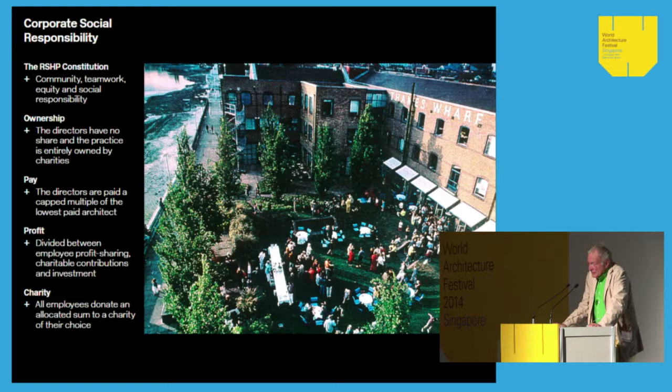We gave our office to charity. Charity runs it for us. It's a board made up of 2 external people, 2 internal people. We have the concept that nobody earns more than 8 times the lowest paid architect after 2 years.

The rest of it goes into charity. That charity is basically divided between profit share to all the people in the office, plus every person in the office has a charity he can give a certain amount of money to. It's in a way something about saying we're fortunate, I'm lucky, and we should share that fortune. It's very much about the distribution of our wealth, which is the critical problem of today, the lack of distribution of that wealth. So that's what this is about.

I shan't go through it. You can read it.

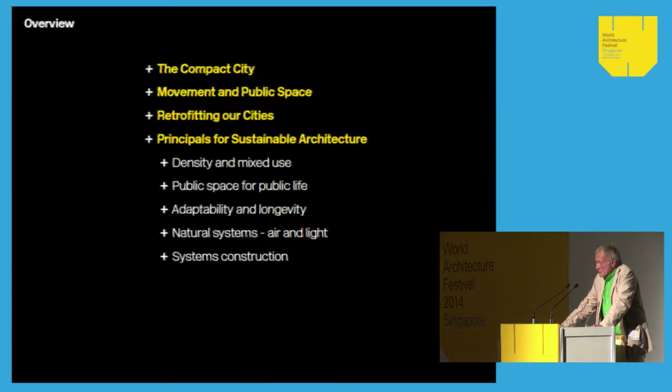And of course, the old cities. Here in Singapore, one doesn't have this problem, or nowhere near as much. But cities like, let's say, all the British cities, which have great interests, have tremendous areas of brownfield. Their retrofitting is more important, probably, than building. And the principles for sustainable architecture.

We've now got to an age where we're driven by, economically and culturally, by the large urban hubs throughout the world. 10% of the population of the world lived in cities 100 years ago. Today it's 50%, and in the next 25, 30 years we'll see 80%. More or less everyone is moving into cities, which is good in terms of climate change and sustainability.

Large cities use half the amount of energy that small cities do, and as the Sierra Club of America pointed out, a house built in the countryside to the latest eco standards uses more energy than a rotten old house in the middle of an old city. That's not so much about heating and cooling, it's about all the other things that have to go with it—first of all, a car, but also schools, hospitals, and so on, which also have to be rebuilt or built somewhere near them.

So environmental sustainability is critical to the hubs, and the hubs are now, in my opinion, the principal places. I hope that we will see a move towards many more, shall we say, Singapore-type—we nearly got Scotland-type situations—where we see cities and nations breaking away and becoming independent, but within a massive global framework or regional framework.

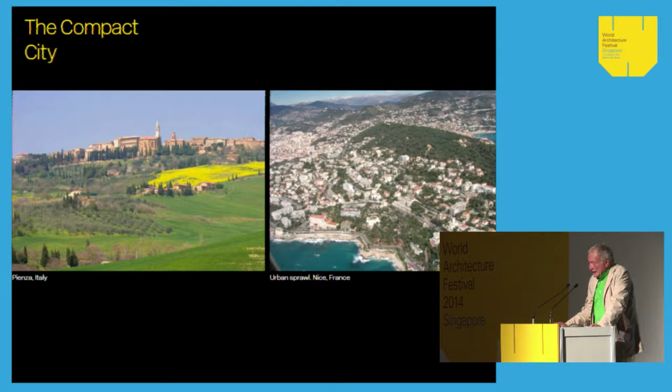And it is highly unsustainable. Two diagrams from the Urban Task Force, which I chaired. That was the government's, the Labour Party's government, Tony Blair, Prime Minister, and the Deputy Prime Minister, set up and asked me to chair this organization, which looked at how we could make cities more livable.

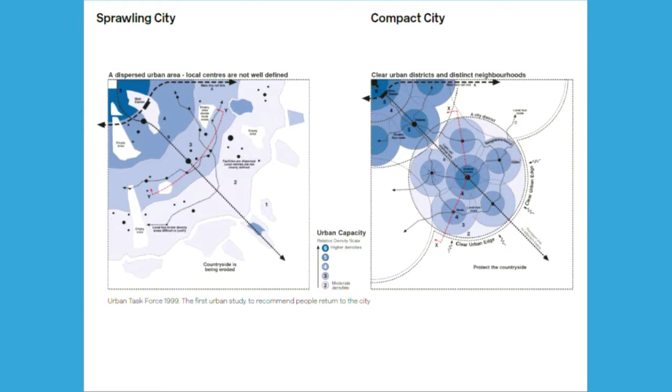On the left is the normal city. The blue, the darker the blue, the higher the density, the lighter, obviously the lower the density. There's no neighborhoods, there are no city centers. There is a sort of public transport which doesn't relate to it. It's typical of most cities which are not planned, which we have not thought about.

And on the right is the city of districts, of neighborhoods—the city which is related to transportation hubs, related to densities at the center, related to universities, health, and so on, all being within a walkable distance. And a sharp edge where you can get into the countryside when you need to.

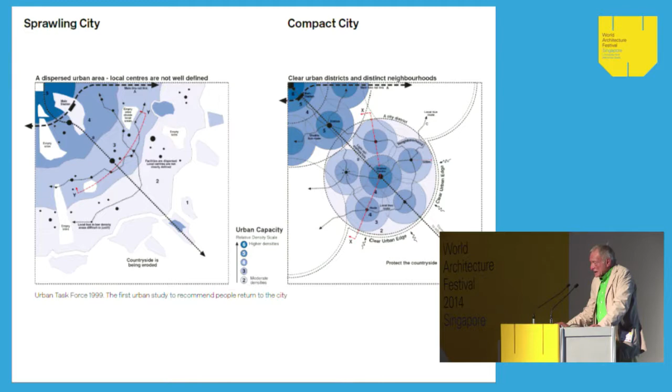Some of these are more related to problems we're having in Britain, but they are very much related to many of the problems. Obviously here in Singapore, you don't suffer from brownfield—that is, developments which have gone out of date, which have had to be demolished. But in most of the rest of us, most of it we do. And there's a new craze for new towns. I'll talk about that in a moment.

This is a new town in a city. This is King's Cross. You live, work, leisure. It's a true framework. It's got terrific communication. It has lots of public space. It has schools, it has hospitals. It has nearly everything. It's a true new town within a city, which is what I'm going to be talking about quite a bit today.

Maragall was perhaps the most key mayor in Europe, in the way they selected architects to develop the area. Because they didn't have much time, they didn't want to have competitions in those days, they selected architects that had some form of recognition, gold medals or silver medals or so on. And the standard of architecture is extremely high.

And up above there is Germany, Hamburg, another new town, the old port, which is no longer used, which is a wonderful new town.

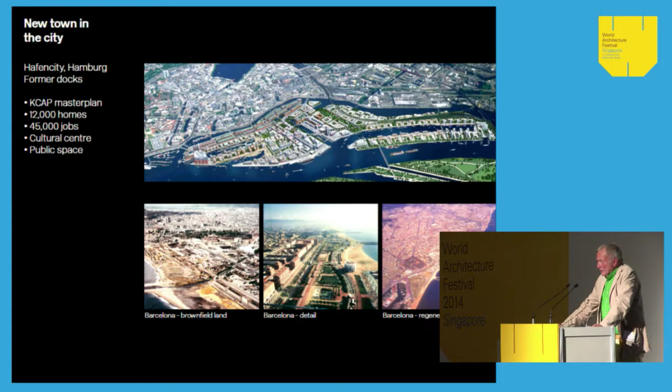It's only when you get to offices that you can get more height, and therefore more density. New York is different because you put it along streets. But in Europe, the highest density is usually achieved between about 6 to 8 stories. I'm not against towers, by the way. I'm not against density achieved that way. I'm not against towers for many reasons. I'll talk about that in a moment.

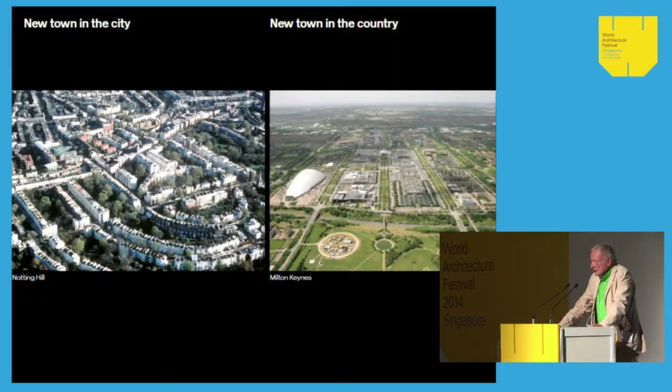And the right hand shows you have to use a car. You don't know your neighbor.

This response to Milton Keynes, and even more the early new towns like Ebenezer Howard's, were much more logical than they are today. 100 years ago, the average age of living in a city was half that of living in the country. Cities were hellholes. In 1842, the average age of a worker in an industrial city in England was 17 years old.

No wonder everybody wanted to get out, and that's understandable. That is not so now. Therefore, there's no reason in these type of situations - there are some situations where there is a reason for using greenfield land, but in our situation, Western European industrialized society, American, there's no reason for new towns at the moment, maybe in 20 years' time.

Changing to another of the themes I'm going to talk to you about, apart from the compact city, is movement and public space. In relation to celebration, we celebrate movement. Movement is enjoyable. Movement is what makes cities work - hubs and movement.

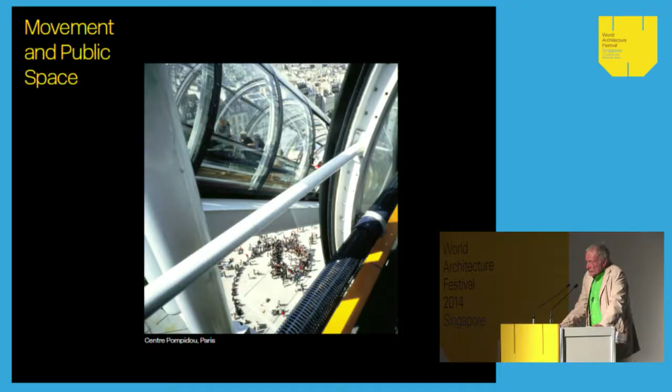This is Beaubourg, Centre Pompidou, where instead of going into a lift or elevator, with your head pressed against somebody you don't know - if you're a small person, into somebody's stomach - you actually look out and have this great view. Enjoy it.

And then, since this is the question, movement can be a driver of form. In this situation, not only do people perform below it and look down at the circles - people watch people, really important mantra, people watch people - but also, of course, you're looking out to the rest of Paris, and it's a fantastic view.

In terms of regeneration and movement, Trafalgar Square - if there is a centre of London, there isn't really, because London is unique in that if there is a protection of London, it's the sea, so we don't start from the centre and move outwards. London is really 32 towns in search of a centre, the 32 boroughs, and therefore it's dispersed. But if there was one, it would be Trafalgar Square, and up to 10 years ago, it was a roundabout. So we had what was once called the heart of an empire, and the heart of an empire was the roundabout, which seemed to be wrong.

We did a plan for it and exhibited it at the Royal Academy, I think in 1986 - this is part of it, the one you're seeing now. It was then put into form by Norman Foster, and it is now a fantastic square. The lower one is the north side of the Thames, which we are trying to close, and continuously try to at least pedestrianize. After all, cities are for people, not specifically for cars. Cars have their advantage in some situations. You want to minimize them if you can.

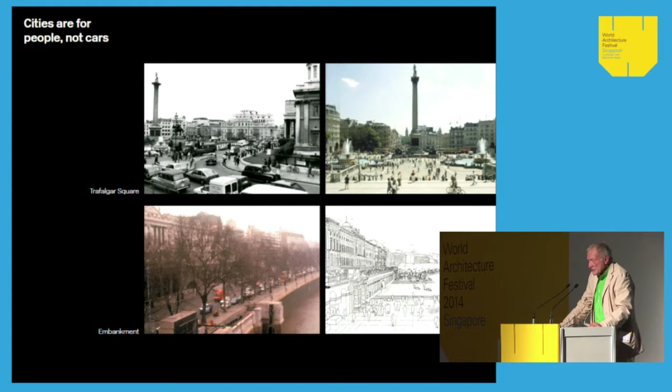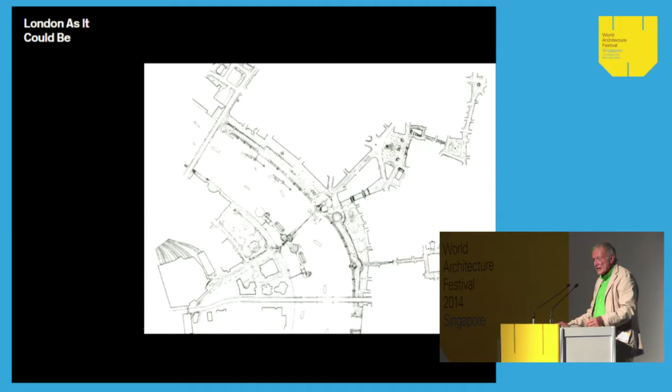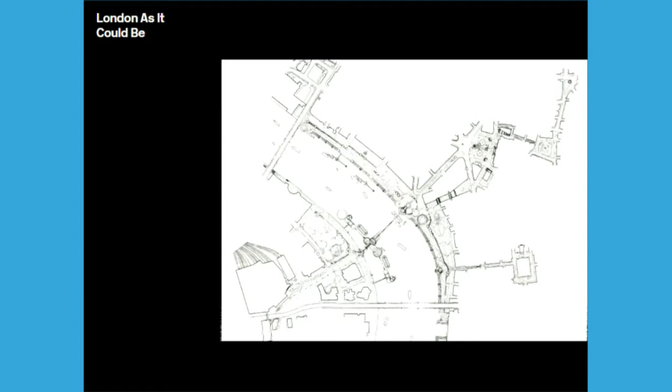This is a plan, I won't go through in detail, about beginning to humanize the center of London. The most successful part is the South Bank, which without doubt is the best urban regeneration in London, where people can walk with their parties, where there's a mix of all cultures. But here also you can see Trafalgar Square. We want to do Parliament Square, which we've failed, and so on. It's again, how do you do it step by step? How do you plan for the future to make your city more human?

This happens to be Strasbourg, a city where these trams were put in about 15, 20 years ago and have changed the nature of the city. They've freed up whole spaces where you can have squares, where you can have shops, where you can enjoy yourself, where you can get what little sun you can get in Strasbourg.

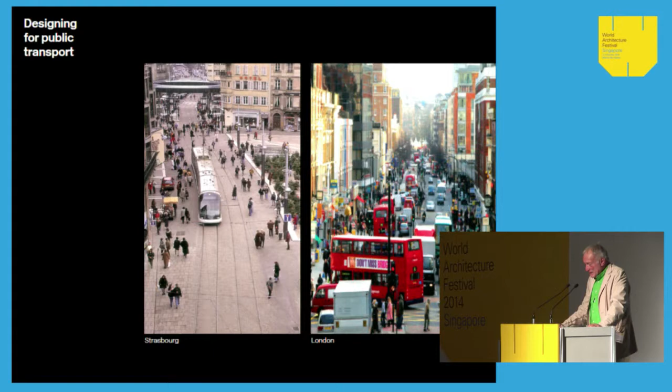Copenhagen has, first of all, one of the highest livability rates, enjoyability rates anywhere in the world. A third of people in Copenhagen go by bicycle. It takes all the pressure off the transport, by the way, though you have wonderful transport systems here. So most people go by bicycles. They've also gone with the brilliant Jan Gehl, who's followed, especially Copenhagen, for the last 50 years in film and drawings to make it again more humanistic.

A couple of figures that interest me. Population using public transport: 81% of the population of Los Angeles uses the car to go to town. Not only do 81%, which means nobody meets anybody, except if they're going to a film premiere, but in fact Los Angeles is over 60% tarmac, or whatever you call it here, macadam, black stuff on the roads. That is way beyond anywhere else. It's also got more roads than everybody else, and it's got more congestion, which tells you that building roads is not the answer to the problem.

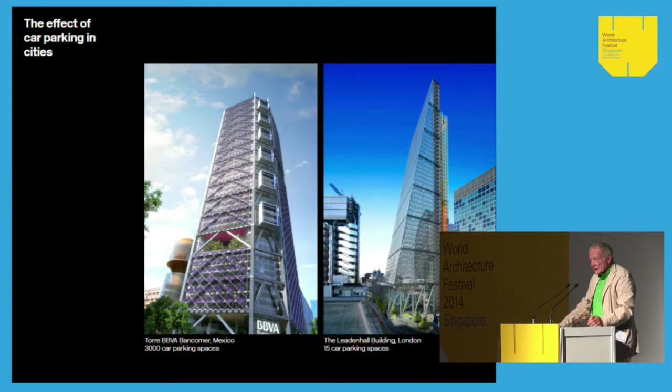So it's a question of being decisive about how you control transport. And I've never heard any complaints, by the way, in the City of London, the city that I've lived in for more or less all my life. It has never been an issue.

So the point of talking about expanding outwards is: let's densify these areas before we move outwards. Not so much densify, intensify would be the right word—to intensify around those hubs. I'll be talking a bit about those in London, and there are hundreds of these.

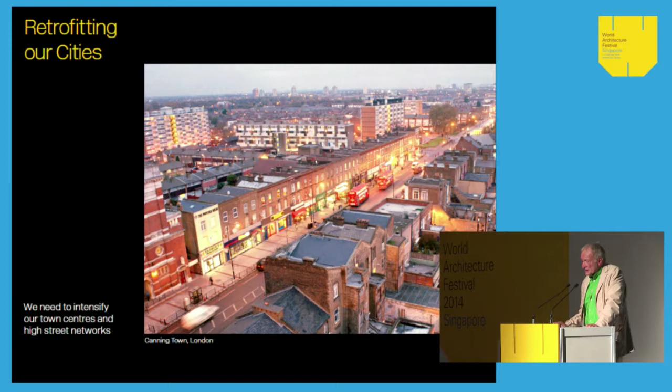If you look at this photograph, you could easily add 100 housing units or apartments without any difficulty. And there are 600 of these in London, which more or less meets the problems that we have in London.

Manchester, the second largest city in Britain, just over 1 million. This is one of the problems of Britain—it's got London, which is booming. It's got about 8 million, growing a million every 10 years. We'll probably be at 10 million within the next 20 years.

These cities, like Manchester, have massive areas of dereliction. This is just off the center—you'll see a diagram in a moment showing the center. In large part of this area, only 1 out of 5 buildings are actually occupied. The rest are derelict. We're talking about a nation which is the 5th richest in the world, so you have to say there's something wrong with the way we deal with buildings.

I believe that housing, a roof over your head, should be considered the same as food, as health, as education. It's in the same range. Somehow we believe it's really a manipulation of capital only.

So Manchester, which, as I've said before, is a successful city, has these vast areas of dereliction. So people move out towards the countryside, have to buy cars, and so on.

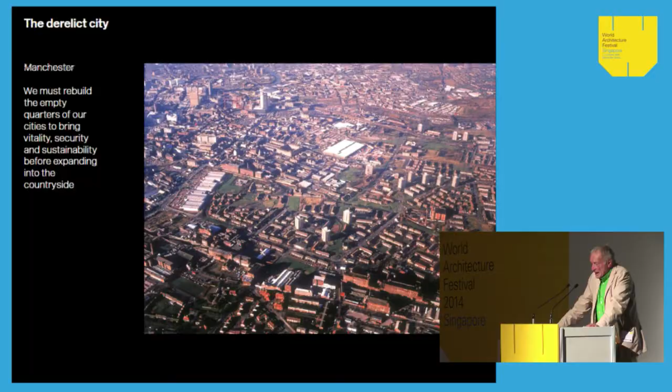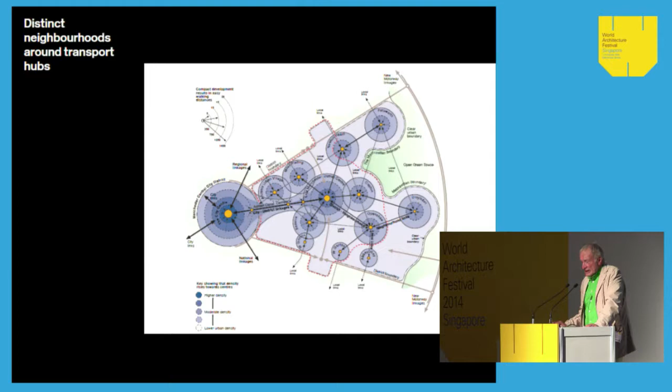Now we are moving towards that—it is more successful, it is better. Last week I attended the Labour Party conference at Manchester, and I told some people: just look, walk from the station to the conference and see how much brownfield there is before we build new towns outside. Even in Manchester, the second richest city in Britain, there's a vast amount of derelict land.

London has gone through a revolution. In the 1980s, when I started building Lloyd's and began to get involved in the City of London, the general feeling was that London was sort of static, and that Frankfurt would be the next business city of Europe—it would become the hub of Europe.

Now it seems strange to us. I've nothing against Frankfurt—anybody who comes from it, I'm sorry—but London has a lot more than Frankfurt has, because it's a real mix, it has everything. Somehow it picked up, and London is extremely exciting. I'd say that today, and we've talked a number of times to planners here, London, together with New York, are the only two global cities.

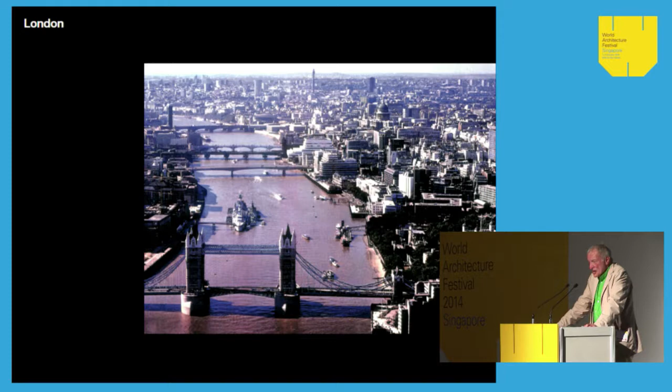It does show you that in 20 years, the whole thing can change over quite quickly—probably happened in 15 years. Going down the drain, Lloyd's of London were talking about maybe having a second headquarters in Frankfurt, getting ready for the debacle in London. Fortunately, they didn't—fortunately, most people didn't. And London is now amazingly vital.

You can get nearly anything in London, from culture to business. Extremely, extremely expensive. Why is it expensive? We just got to that point.

One of the problems, very much a problem in England, is that whereas in Hamburg, which I showed you, Barcelona, France, the Netherlands, etc., basically the elected councils do the planning and the basic designs, then go out to contractors, housing contractors and so on to build—we have this funny idea that the answer is, we need housing, therefore let's go straight to the big volume house builders.

But the volume house builders, and they would agree, are business people—their interest is profit. If one house will get a better profit than 100, they'll build one house. If there is a restriction on housing, that pushes the costs up, which is what's happened to London. London is now, I read the other day, the most expensive city in the world.

This is a problem, a lot to do with residential. A lot of the problems stem from the way we have handed over the power of development to house builders rather than to society, which is the community and therefore the elected body.

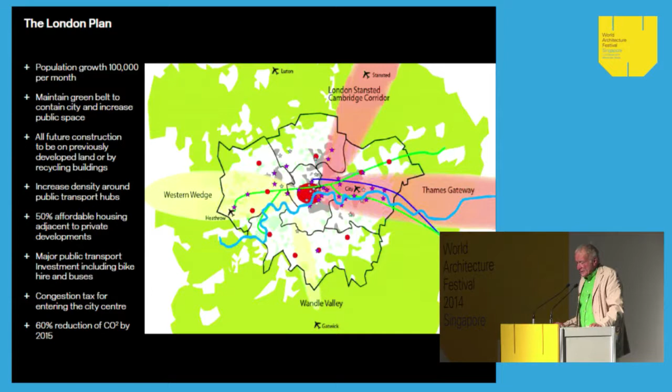They were very exciting aims, dealing with the population, dealing with keeping the green belt. We built well, at quite a high rate. We used no greenfield whatsoever. We banned greenfield. The urban task force said always brown before green, brown being the derelict land. Ken went beyond that, he said never touch green. I won't go through all these figures, you can read them perfectly well.

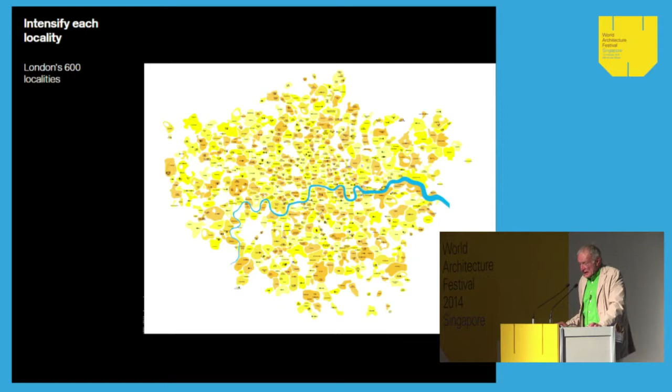This is research looking at London at what we've called localities. Localities are places where 2 or 3 shops, maybe a kindergarten, a health center, a few bits, something creates a nucleus. There are 600 of them in London. They are the vitality of London. Those places are all within walking distance of housing. You never need a car to reach your nearest locality, which is one way we defined it. It's an interesting way of looking at a city, not just neighborhoods or districts or cities, but right down to what is a locality.

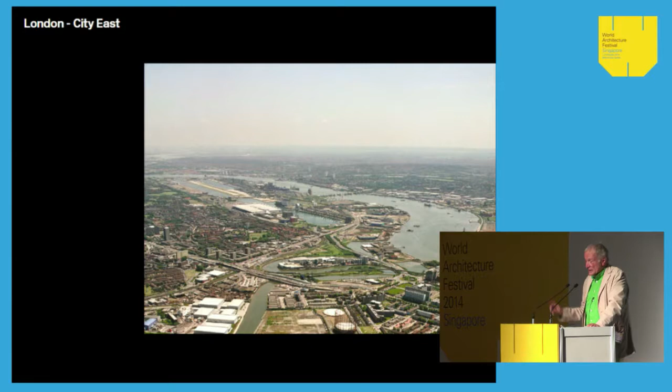This is a bit like the Manchester situation that we haven't built here. This is the Docklands. London was one of the world's greatest ports, was the world's greatest port. Now nobody goes by ship to London because if they're going to go by ship, they'll go off much nearer the coast. We were also a massive manufacturing area, especially of cars. All this has gone, leaving behind a vast area of dereliction and poverty. Three of the poorest boroughs in Western Europe are here, three of the 20 poorest boroughs in the whole of Western Europe are right here in London. London is probably the richest city in Europe. It shows an inability to distribute wealth.

The point we're making all the time is fill these in. Start from the center. If you're developing, start from the center and outwards. Start from the hub outwards. Start from the district center outwards. Start from the city center, move outwards.

This is a study we made which showed we could get a vast number of dwellings in that area: Royal Docks, Canary Wharf. The Olympics was a roaring success, and in terms of the Olympics, it's opened up a whole area of new housing. It's another new city.

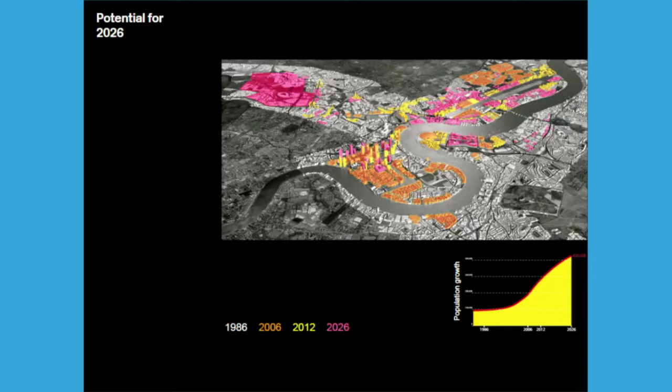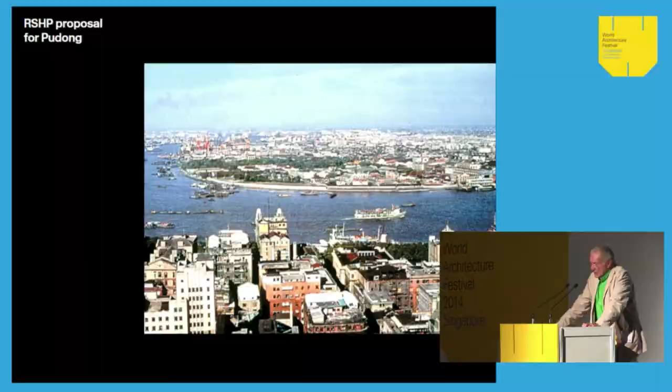Shanghai. We were asked, I think by Mitterrand, in the early 90s, to talk to the mayor of Shanghai. There were 6 firms asked, a consultation rather than a competition, to talk to the mayor about the development of Shanghai. At that point, Shanghai was about 9 million people. It was all bicycles, it was all walking.

It was obviously at the beginning of a new era, in the sense that things had changed vastly since dominant communist control. The mayor wanted to know how to proceed and what we could do with Pudong. Pudong had no links, being across the river from the Bund. The Bund is the area on this edge here, a wonderful part of the city with great buildings. We made some suggestions.

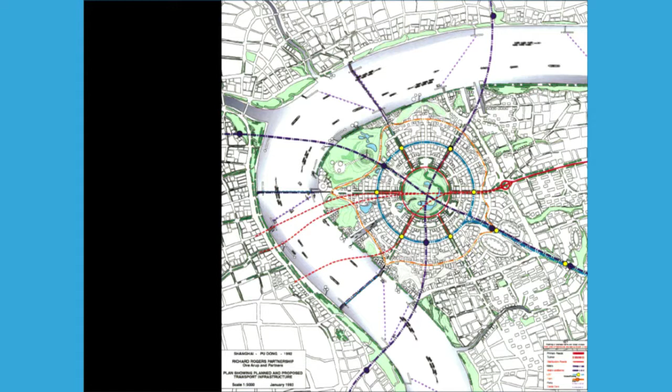We produced this plan. By the time we finished it, they had more or less built the town, nothing to do with what we drew—it was immense speed. We suggested there should be half a dozen towns or cities along a light railway line, with connections back to the main city: bridges, subways, etc.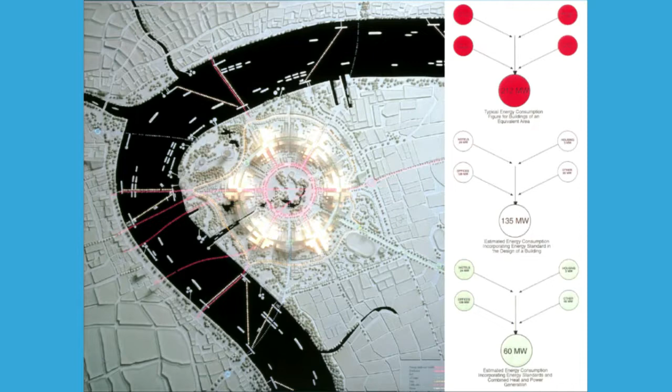Today, with the knowledge we have now—we're talking about 25, if not 30 years later—we would be able to use much less energy. But it does show that if you want to use less energy, you can certainly do it through good planning and good construction.

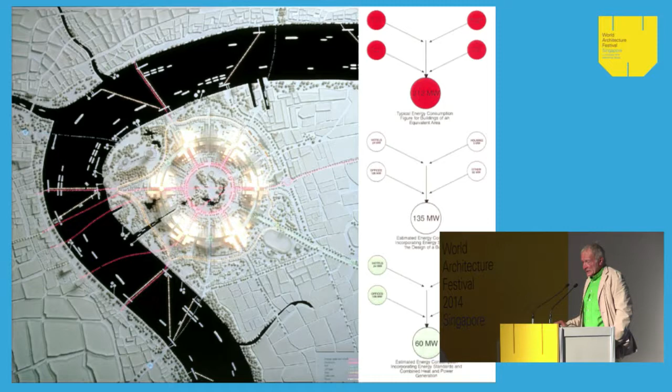So a model of that, a model of Shanghai, of what we built, or what we suggested there. There's a great Central Park. A series of avenues came out of that, and then there's a ring which connected all the hubs. The hubs were about a mile apart from each other. The center of those hubs, but basically along the tramway, along the light railway, were all the higher buildings, and live, work, leisure, which is actually on the right-hand side, which is the different colors, were all mixed into the city. So rather than ghettoize work at one end or live at another end, a real mix.

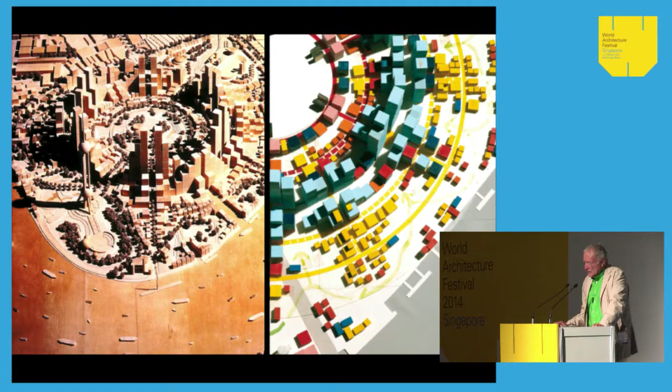This is how it is now. Now, where we had 9 million people, and if I remember rightly, 7 million bicycles, when we first went there, I said to the mayor, gosh, you've got 7 million bicycles. And I think he thought that he had a snotty Westerner looking down his nose. He said, don't worry, Mr. Rogers, we will ban bicycles by the end of the century. Luckily, he didn't. Having said that, in a way, he did, because, of course, you can't cycle here any longer. So what was really a city that was doing even better than Copenhagen has now become a city which is basically completely car-led, because there's no feeling, no spirit of communication between individuals any longer. There's no public spaces. It's the death of public spaces, the erosion of public space.

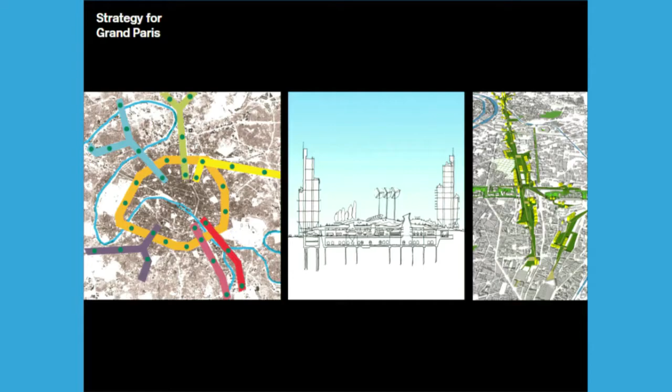Let's touch on a few more before I finish. We are looking at Paris, have been looking at Paris for the president. Paris, again, is a fascinating city, a beautiful city, which has had a down period. Looking at what one can do with the transportation, I won't go into detail. One of the things that we found out was that a lot of the people who find themselves in the center of Paris never wanted to be there in a car or a truck, but there was no way of going from A to B except through the center. So that is your circular road of going around it, that's your stops. And then we started looking at what can you do with this massive area when you have big motorways, big trains, and how do you build over those train areas, which is the next section through the next part, and then the greening of Paris along those routes.

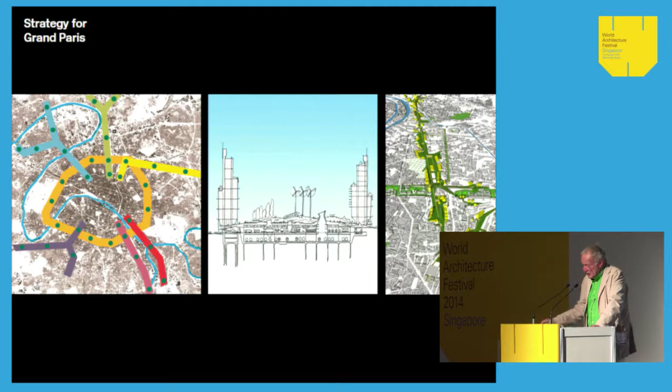Talking a moment now about buildings and sustainability. We have always worked towards trying to lower the amount of energy. There's no doubt that climate change is the most serious threat to our society. It's not a threat to the globe. The globe will go on. Just we won't be there. So we are all now trying to do something to improve the quality of life in terms of climate change.

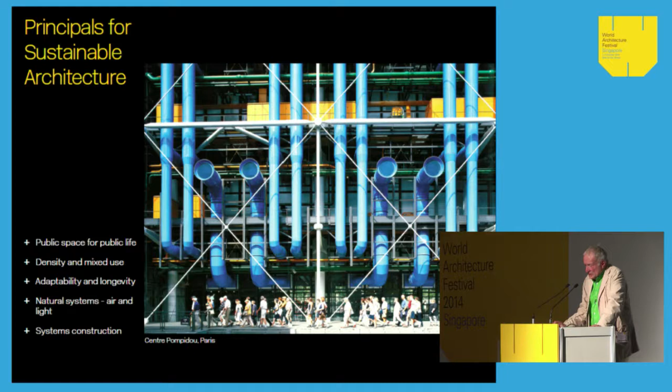This is the back of the Centre Pompidou. The concept, and this is in the days when we knew a lot less than we do now about how to handle it, was that whatever you did with any forms of energy systems, they would be on the outside and they could be removed, looking towards a future where there would be different types of energy control systems. Now, there was a secondary element in that, and that is it gave light and shadow and form, which is what architecture is, but it also gives color, it gives enjoyment. But we use these elements, and of course, structure on the outside.

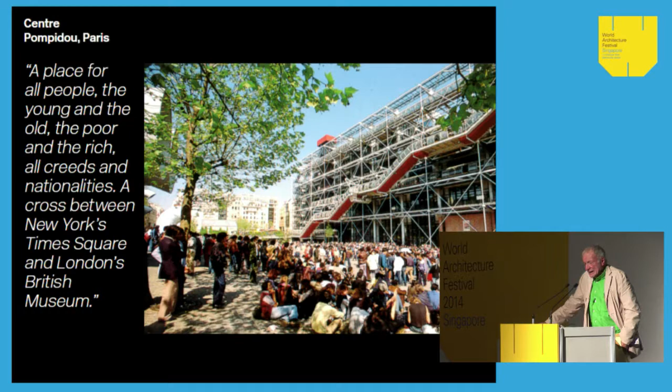This is, in fact, the Pompidou. The statement which you read there is the first statement made when we did the competition. There were 700 entries, and ours, strange enough, was the only one which had a large piazza in front, a place for all people, the young and the old, the poor and the rich, all creeds and nationalities, a cross between New York Times Square and the London British Museum. So culture and excitement, a fun palace at one level of the thing, but also a place where all people could both study and meet each other.

Now, in a way, the piazza has been certainly the most successful place in terms of people who come there. You have musicians, you have poets, you have fire eaters, you have political activity, and the people look down from that escalator. And what is perhaps the most successful part of it is the fact that the public domain actually goes up the facade.

In other words, it's not just the horizontal space, it's actually also up the facade of the building. It's a light structure, a light framework. It was done with Arup, with the brilliant Peter Rice, who is now dead.

This was actually the competition facade. And what is interesting about it, it has the ideas. There's the celebration of movement, the elevators in the center, this light steel framework.

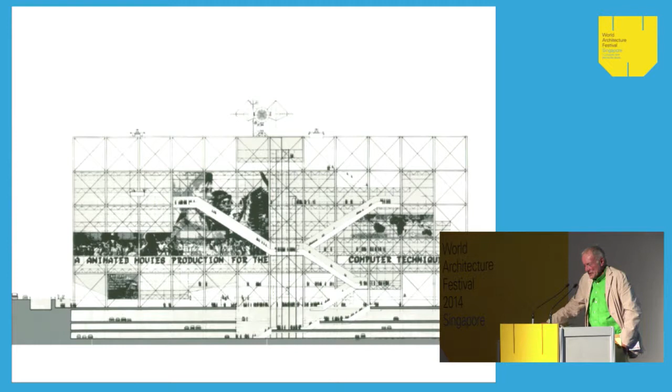But it's quite interesting when one looks back, again to 1970, many many years, and sees how much is a political concept. It's about anti-Vietnam, it's about people coming together. We were often asked by presidents, who controls the facade, the communication of the facade? And one said, it's all about culture. And people said, is it really? Look at this, who's controlling the political element? We lost that battle.

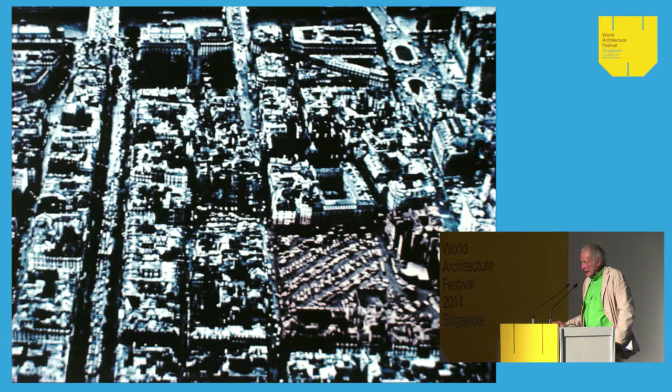This is how the area around Centre Pompidou, Beaubourg, was. It was a very poor area, the brothel area of Paris. It was a parking area since 1931. The parking area had been pulled down because it's a brothel area. The idea was the easiest way of getting rid of prostitution is to pull the buildings down, but the prostitutes were clever and moved one street back. And then it became, of course, the Beaubourg, which is this building here.

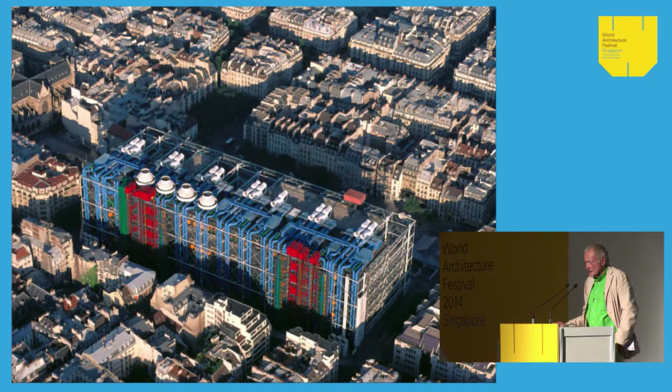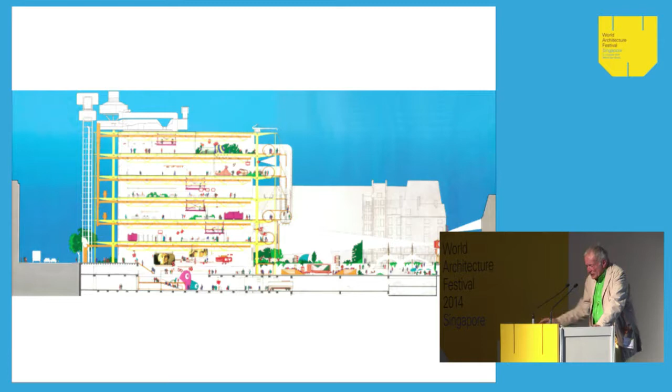And the concept, again, was massive flexibility. Big floors, which could be a museum, a hospital, a university. There were big floors, well-serviced, and a great public space. And there you see the concept of the structure moving out. I put this among cities because it is a small city in its own way. It has these immensely free spaces, the market spaces, the trading spaces, the cultural spaces, between structures and movement, and the great piazza.

I'm a great believer that the form of the building has not only got to relate to the functions, remembering that functions change - really the only constant in life is change. Many of us live in warehouses, and warehouses have moved out into other places, but structures stay. So the idea of this framework, this sort of bookshelf, a very fine framework.

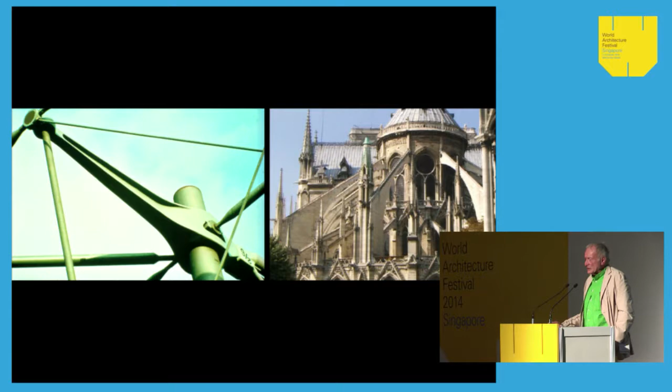That's a cable, this is the end of one of the nodes. That's an 8-ton bracket, water-cooled columns pulling down. And I put that against a French cathedral, Notre Dame, to say celebration of structure has always been with us. It's not something new. It's one of the ways that we can get scale, one of the ways we can get the play of light and shadow. It's one of the ways in which we can get celebration.

The construction is imperative. I think, again, architects are losing control. And the last thing I'll say is a little bit about the role of the architect as I see it, at the end of this talk.

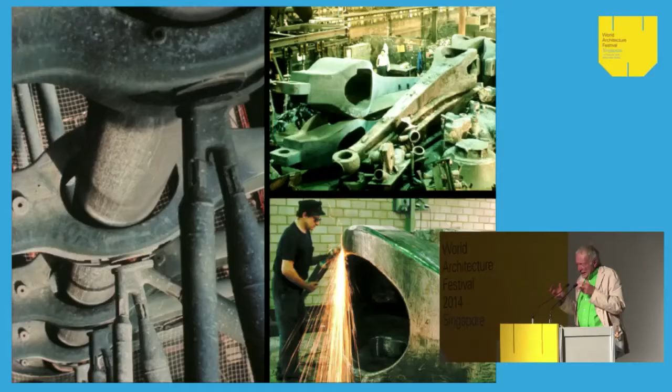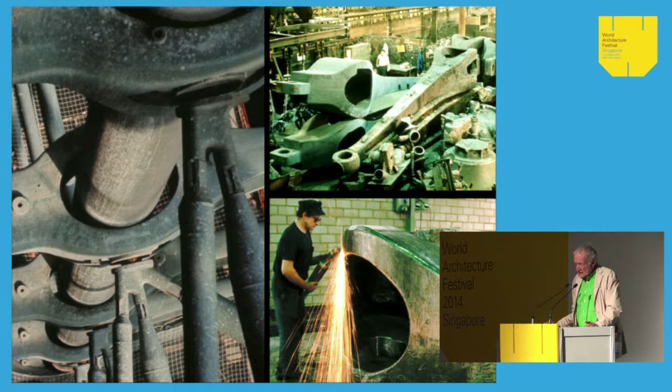But here you see very much the architect working closely together with the engineer. I mean, you really couldn't divide the line between Renzo Piano and Peter Rice. Yes, Renzo had a better feeling about maybe uses of buildings, but he had a very good feeling about structure too. Peter could do pretty much the same thing. These are wonderful, you're making with the hands, you're making these amazing pieces. And it's very exciting to show them, to celebrate them. And the danger, which we have continuously with clients who say, we only want a sketch - that's the end of architecture, because architecture is about the detail as much as the idea.

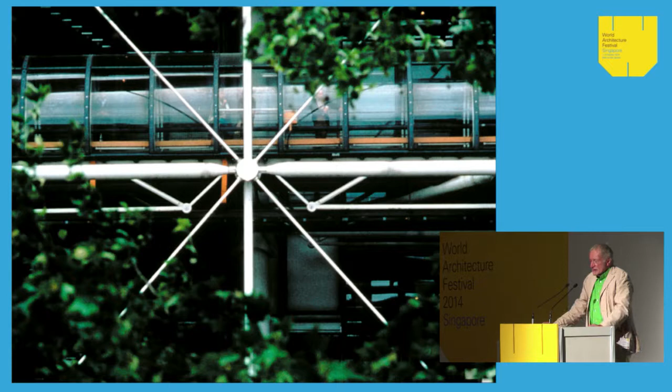Transparency, another of our favorite words. The Pompidou Center, the movement system up the escalators, the feeling of transparency of layer upon layer upon layer. The scale of the hand. Cross-bracing at the Pompidou, the leaves give you the scale of it, a certain fineness as well as a certain heaviness.

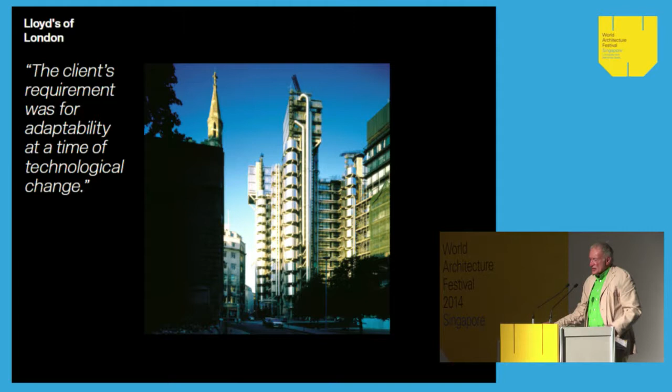Lloyd's of London, the client wanted a flexible building. They'd occupied the building four times in about 30 years. They wanted the building to last at least into the next century. We managed to get that far. One of the ways that we did it was to move the service cores outside the building again so that they could be changed. And the central part of the building was, like Beaubourg, really a big warehouse.

And that, on the right-hand side, is a medieval city. London is medieval, it's got streets which are irregular, to put it mildly. So we managed to make a square building and then fill in the spaces with the service cores around the outside.

That gives you that dialogue between the solid form at the back and the cores in the front. There's also a diagram showing longevity of parts. Streets, especially in Europe and also in China, are hundreds of years old. On the other hand, mechanical services, like any bit of machinery, have a very short life. You have to think about that if you don't want to demolish the building, and it's not sustainable to continuously demolish buildings.

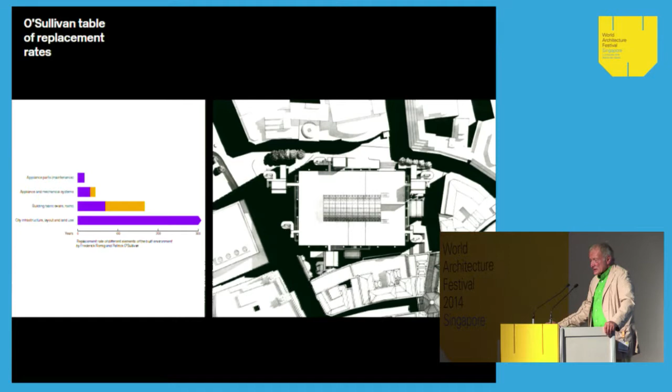Interior, the views. In a way, if Pompidou Center was very much a container building, this tried to respond much more to the context. It's interesting because we did do it - the building slopes down to the low buildings in the back and goes up to the high buildings. None of that exists today. All the things we thought we were taking as points within the environment, which people said, oh how clever, you're responding to the environment - not one of them exists, which makes one think a little about how one responds to the local environment.

The importance of detail, the points of the grain, of scale, of mass, of the prefabricated toilets. What's interesting when you look at this, and you'll see the building we've just completed, is now this building looks nearly 100 years old in comparison.

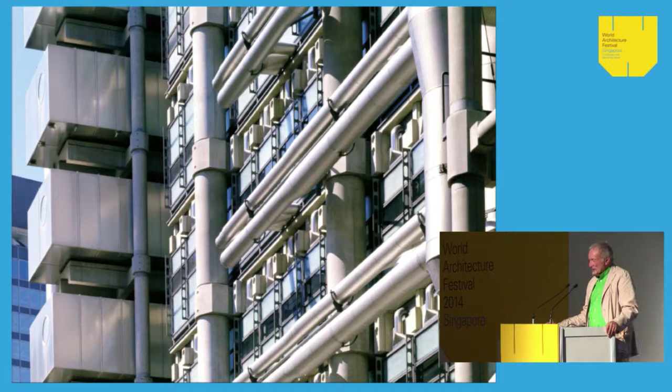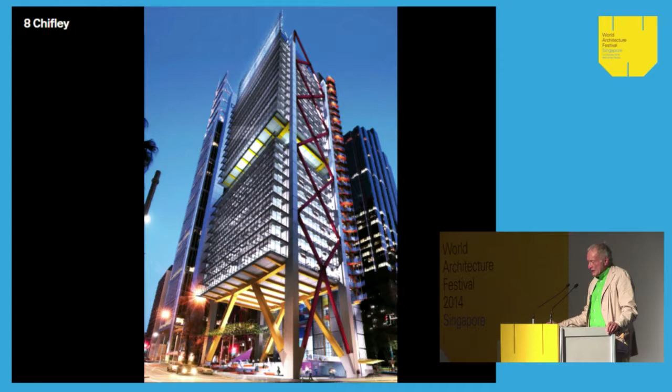We've just completed 8 Chifley, which is in Australia. I won't stop here, but it's a building in Australia with a very important public space below it, and spaces all the way up the building. These are the spaces, the courtyards that you go through as you go up the building.

These are some courts. The main message here is that buildings like courts are not prisons. In the 19th century, we built courts like prisons. Courts are schools for learning about justice. They should be public. People are encouraged to go up those staircases onto those areas. The wooden things are the courts, and there are office buildings behind them. People are encouraged to take their children with them, to take their old people with them. So this is a piece of the city.

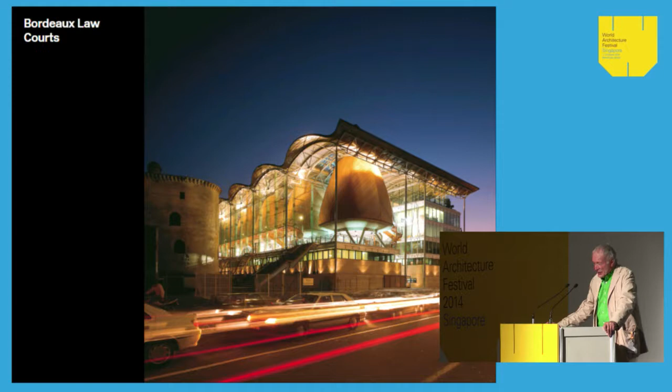It's in Bordeaux, fantastic city, beautiful city. It gets more beautiful every day. It made its money out of two very liberal concepts, slavery and drink. But it is a wonderful city.

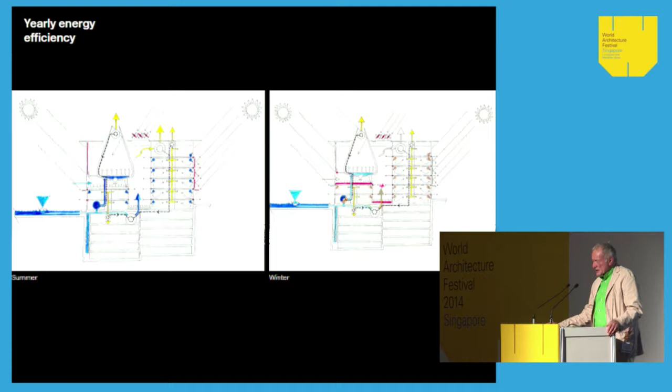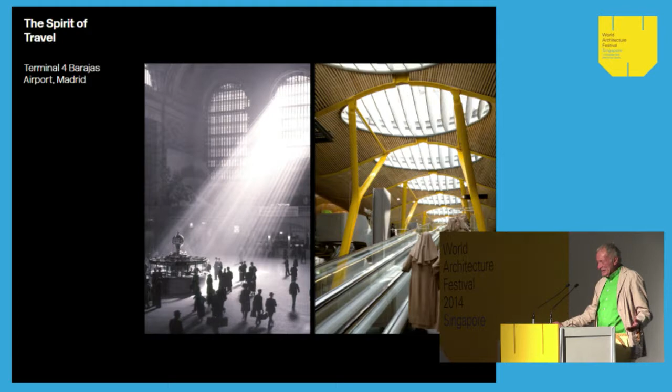In a way, when we got the program or brief from our clients, what they really wanted was a shopping center with wings. They were only really interested in making money out of the shopping center - they didn't care about flying. There has to be more to flying than buying goods. So we wanted to capture that spirit. This was 1.4 kilometers long. It had to have some sort of ownership.

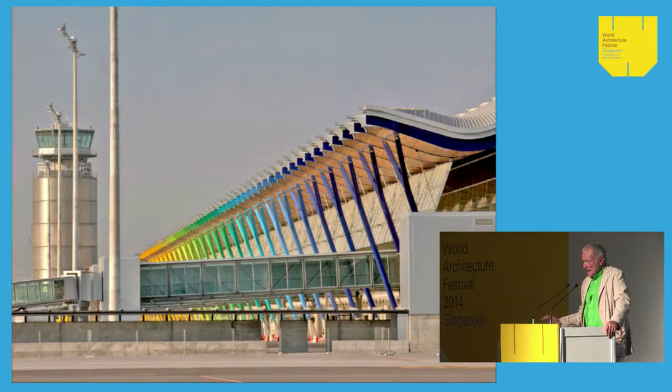And here again, we use color, the same way as we did on the Pompidou Center, where we colored the different ducts and so on as our codes. There's codes in Europe which say basically red is exits and blue is air conditioning and so on. Here instead there weren't these codes, so we decided to use the rainbow as our guide. Really the poetic interpretation of the spirit of travel was that it's more exciting to meet your girlfriend or boyfriend outside the pink column than gate 63. So again, it's about celebration of the spirit of enjoyment.

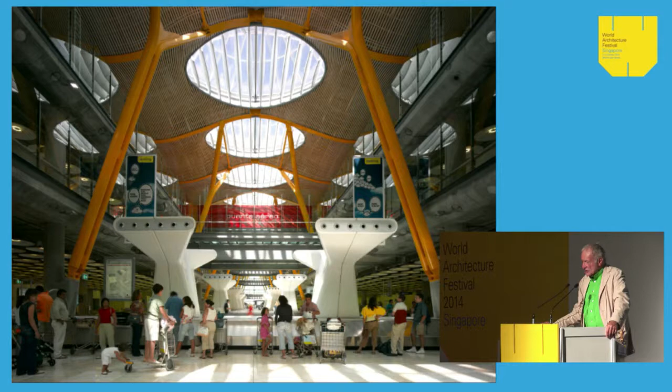The interior, light everywhere. This is the baggage handling. Usually baggage handling is underground, but we brought the light down.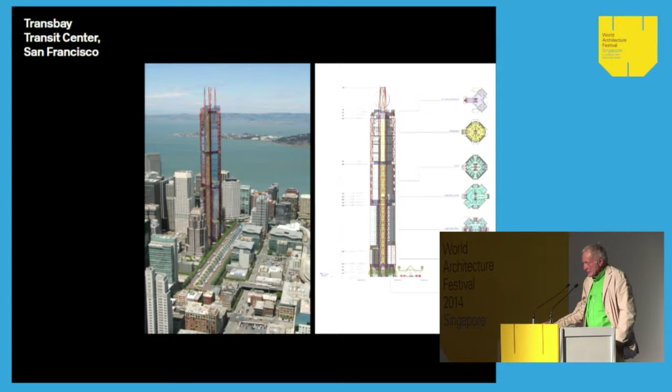This is a village, this was in San Francisco. It was not built, but it showed a mixture of university, market, buses and transportation, as well as offices and living within a framework. And I mentioned this, you can see Lloyd's on the left.

And then the cheese grater, as it's called. The British taxis have a system in which they nickname buildings. I rather like it. This one is called the cheese grater.

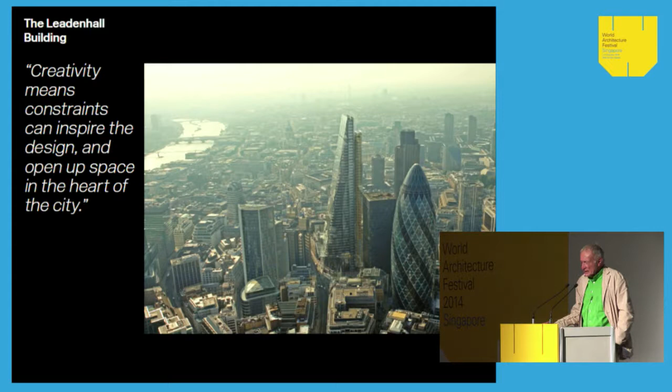It leans back because there's Lloyd's, because there's St. Paul's on the right-hand side. You have to give a certain amount of air between St. Paul's, and again a lot of other buildings in London are controlled by sight lines. There's a sight line there, and the only way you could build a tall building is to slope it backwards, which is what we did there.

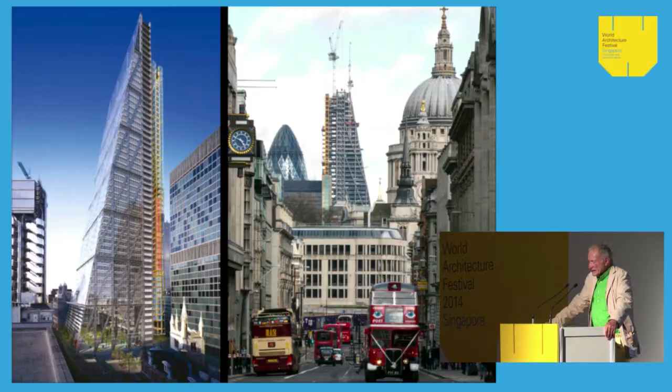So constraints - and this is another of the sort of messages practically - I believe if you turn constraints upside down, you can get very exciting things happening. So the constraint was: A, how do you get it out of the way of St. Paul's, and B, what can you do with the ground so that there's not a cigarette box, however beautiful or ugly, sitting on the ground.

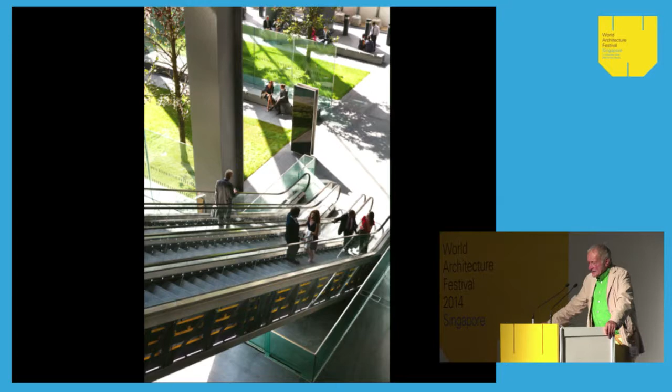This continues the concept. There are the elevators or lifts at the back, the spaces in the front, and then you have a tremendous garden in the front itself. The client accepted that the first 7 stories could be a vertical garden, with no actual office activities.

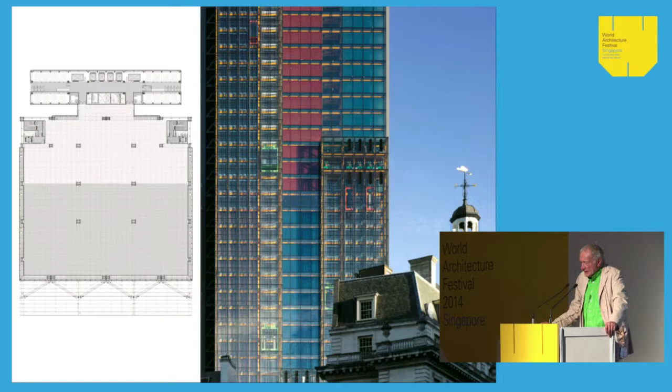This is where - well, you can see first of all the plan: the mechanical services and the toilets at the back, and a totally free plan in the front, getting smaller as you go upwards. And these are the elevators going up to the 7th floor, so that it can be a joyful place where people can meet.

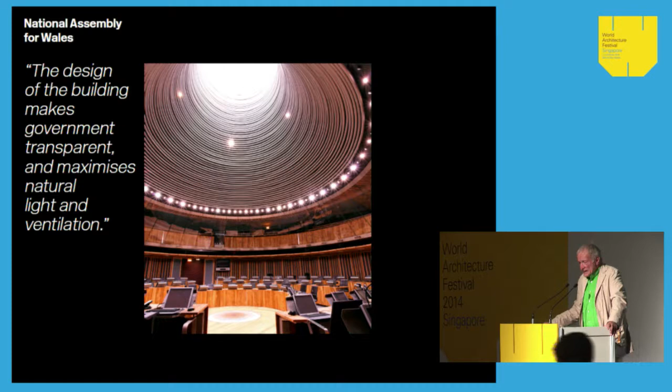And then, I think lastly practically, the Welsh Parliament, again which is very much about designing the building to make government transparent and maximize natural light and ventilation. And so we call that a democratic roof.

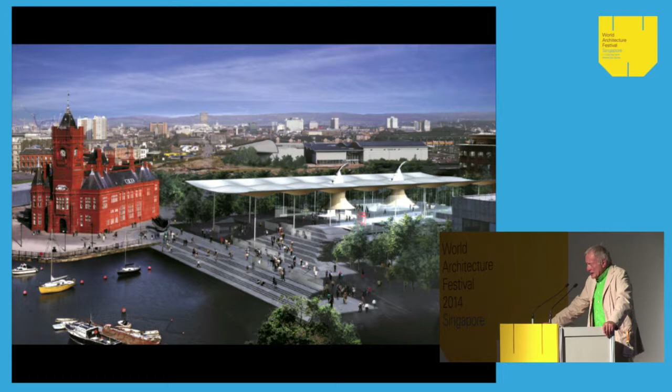Those big white things, which actually are wooden things now, those are the way that we cool the big spaces below ground, which is the private and secure areas. But the rest is just for fun, for enjoyment.

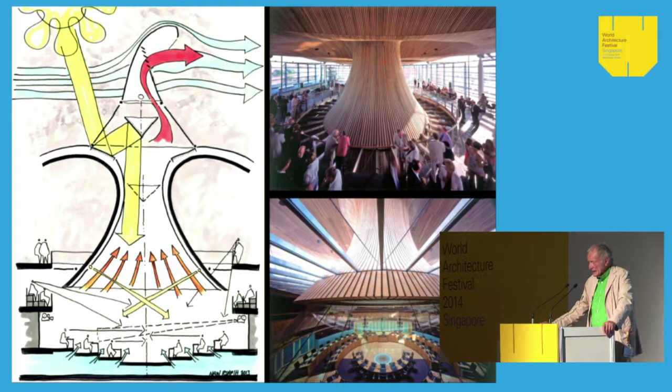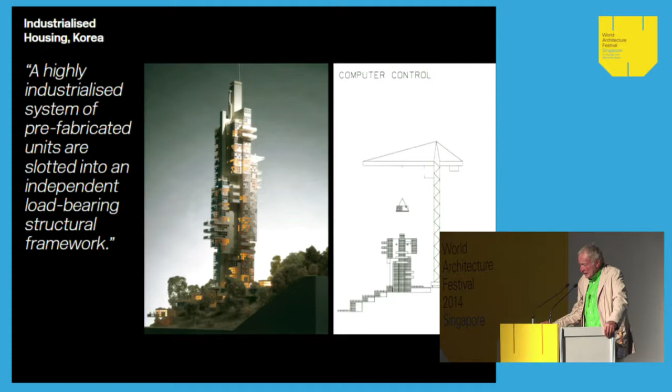And this is very much made like a Model T. The whole thing was pressed out of steel, from the kitchen units to the beds. Everything was pressed out in one big pressing, a highly industrialized system of prefabrication. Each unit was fitted onto a truck, you can see in the diagram on the right, and they could be piled up - they could either be one-story houses or 40-story towers.

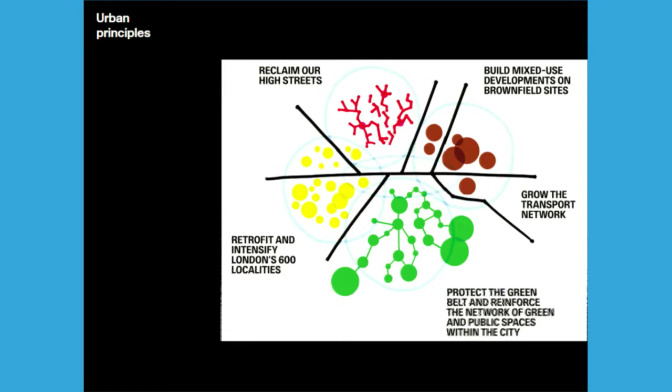And now, to finalize this, in a way it puts together all the urban principles: reclaiming the high street, building mixed use, retrofitting buildings, and protecting the green. These are sort of the key things which we have been discussing.